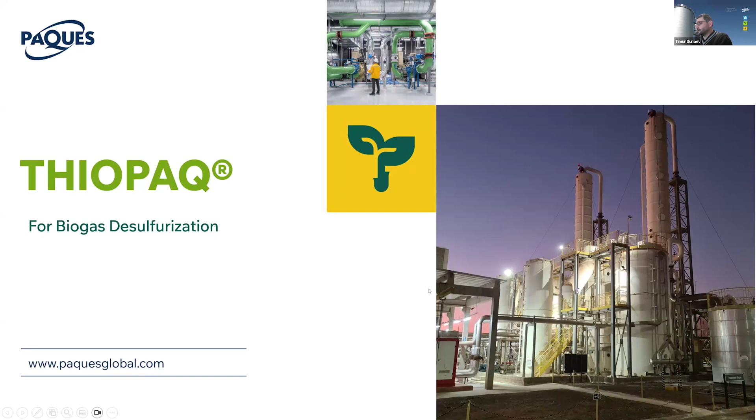You can see PAQUES right here with the headquarters in the Netherlands, but PAQUES as a business has representation across the globe. And today we're talking about our little part of the world that I represent, North America. I call it C2C, Caribbean to Canada, which is where we do our business. PAQUES has been around for a very long time and pioneered innovations in a lot of technologies.

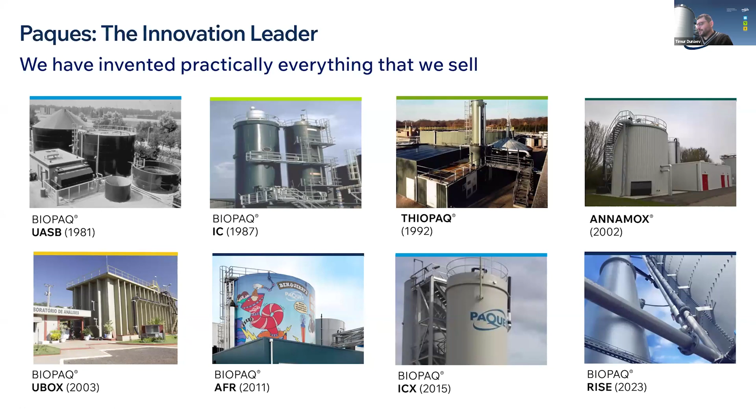And today we're going to be talking about this specific one called ThioPAQ that started in 1992, and to date we have, I think, over 350 installations across the globe and over 65 just here in North America. Most of them are actually in RNG space. So even though I still call it an exciting environmental biotechnology invention, this is now quite a mature technology with good representation across the markets.

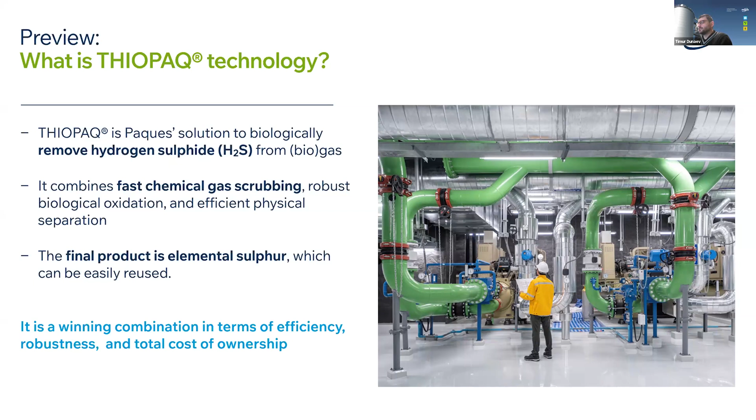So what do we do here? In a certain sense, the scrubbing portion of desulfurization is exactly the same as you would expect from chemical scrubbing, but the nuts and bolts are around the recovery and regeneration of caustic related to H2S scrubbing. So let's dive a little bit into it. Everyone knows what H2S is.

I'm sure everyone understands the challenges pertaining to H2S. Depending on sulfate and/or protein content in your waste stream and your substrate, you'll be converting it in an anaerobic environment into hydrogen sulfide, the most reduced form of sulfur, and depending on your pH balance within the system, some of it is going to be in H2S aqueous form, and according to Henry's law, in balance with your biogas, driving the H2S concentration in biogas. And reutilizing biogas with H2S can present a problem anywhere from safety to corrosion to the loss of efficiency.

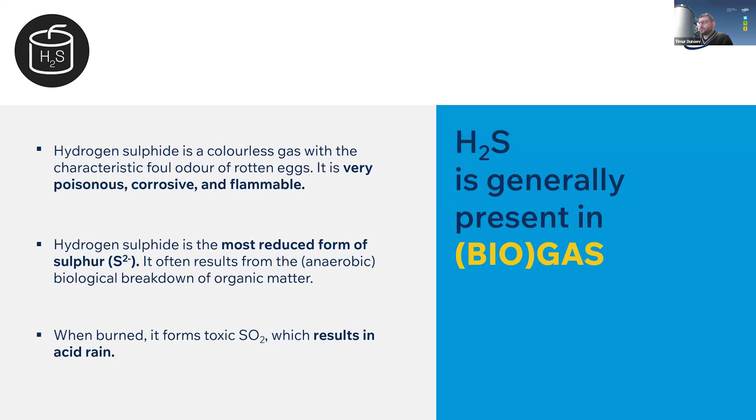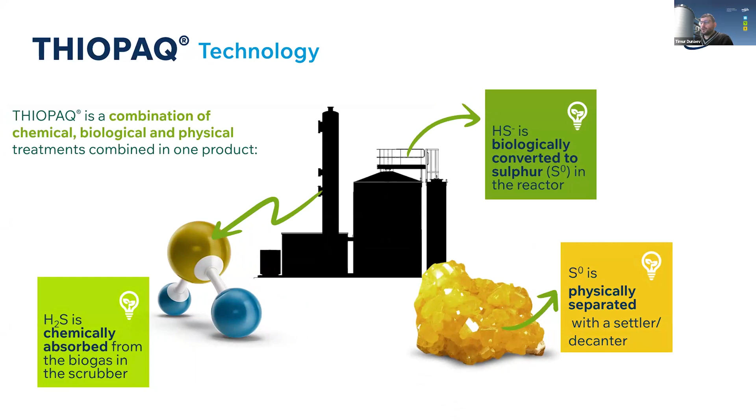And so in most of the applications, especially pertaining to biogas reutilization, but also under Title V burning as well in the United States, because during the oxidation it goes into SO2, the control of H2S is a pertinent topic, right? So as a technology, we take H2S in biogas and convert it into elemental sulfur in the biological form of elemental sulfur, regenerating some of the things in the process.

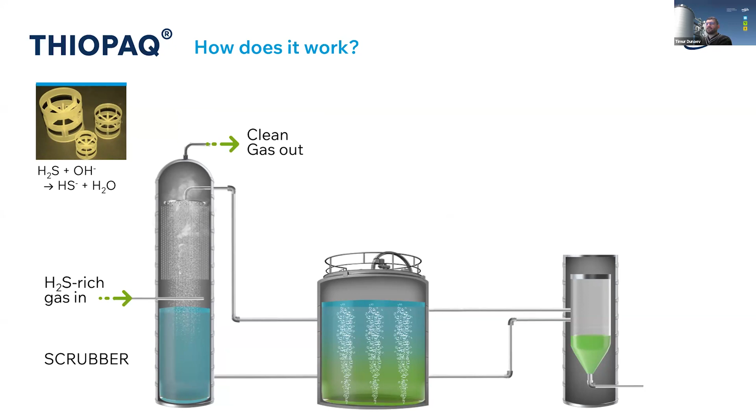As I've already indicated, the chemical scrubber portion of ThioPAQ is a basic free-flowing media countercurrent chemical scrubber with high pH desulfurization, taking H2S from gas and trapping it in the liquid form. And the media inside of the chemical scrubber are there simply to increase the surface area of the mass exchange, right? But what happens next is the interesting portion of it.

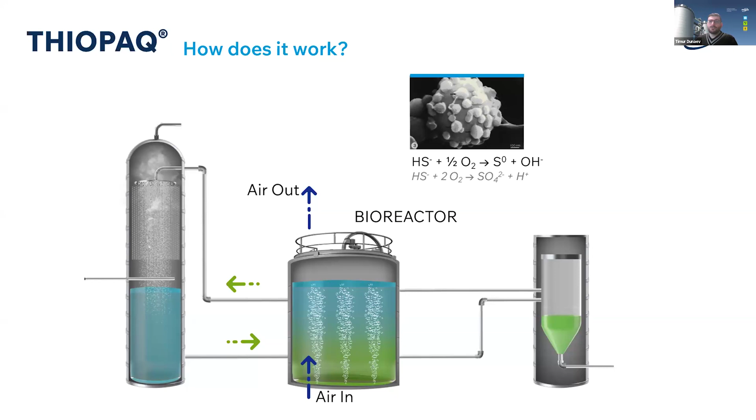Basically, what we do, we take the trapped liquid form of hydrogen sulfide in HS minus form, and then we convert it into elemental sulfur that can be removed. And in that stage, we also regenerate caustic that was trapping the hydrogen sulfide in the form of sodium sulfide. And so the caustic gets regenerated, and that liquor, after we remove the sulfur, is continuously regenerated for continuous removal of H2S from biogas.

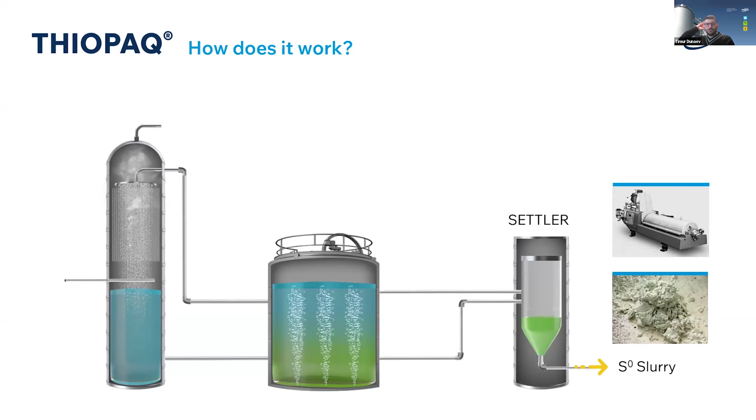What we do with the sulfur afterwards depends on the size of the application, H2S concentrations, but the basic idea, we separate it from the slurry, and it can be separated in a liquid form. It can be pre-settled and thickened, and for larger applications, we even use decanter centrifuges to separate them up to 50% solids concentration in the form of biological sulfur cake, which is quite a good fertilizer to be utilized, especially for alkaline soils. And that's the summary of the overall process.

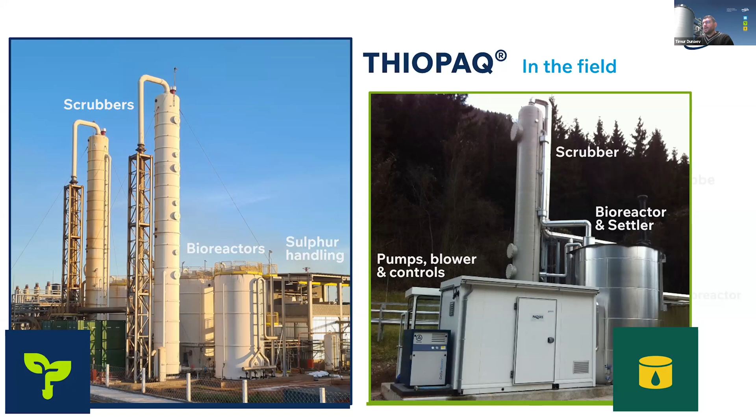So how does it look in the application? I think I started with this, but it's important to reemphasize that this is not just a biological invention. This is a well-established industrial process. So what we do is basically a supply of 2 to 3 separate parts that are then pre-assembled on site. Quite straightforward. Scrubber comes in, and then the rest of the equipment comes in either fully pre-skidded or even in a container, depending on the building availability and or climate, with the entire package control associated with it. So putting this on site is as simple as interconnecting the bioreactor to scrubber and to the skid and or container in a fully integrated system.

There is no need for additional catalysts to be introduced. All of these bacteria are naturally occurring, so we're not generating or devising any kind of bioengineered microorganisms there. As long as we maintain certain environment within the bioreactor, these bacteria and archaea will self-proliferate. To increase the speed of the startup, sometimes we bring biocatalysts from the existing installations, but that's just to ramp up the process quicker.

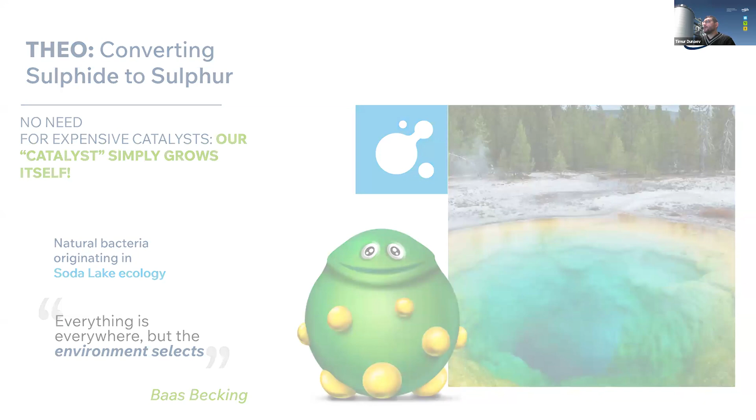The biosulfur itself is a stable form of sulfur, actually, arguably the most stable form of sulfur. Once it's converted into elemental sulfur, it takes a really long time to reintegrate it into any kind of solution, which is a big advantage. So you have a stable sulfur solution that you do not need to worry about. And in RNG applications, it's usually very, very simple to mix it with anaerobic or any other sludge or lagoon that you have on site.

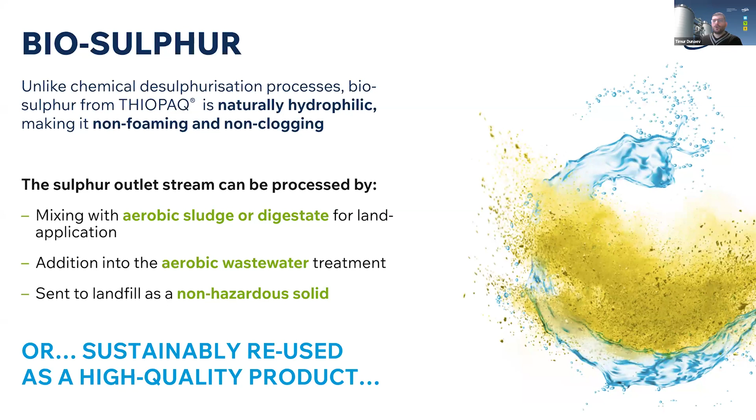And that actually usually increases the fertilizer value of your digestate. And even if that is not possible, it can be sent to landfill as a non-hazardous solid. And so after concentrating it, it's actually a relatively small stream. So it's a sustainable reuse of what would otherwise be considered a waste product.

What are the main advantages of THIOPAQ? We, unless requested otherwise, can always guarantee less than 25 ppmv of H2S on the outlet of our scrubbers. And that is with almost any reasonable influent concentrations going in. What I mean by reasonable is I don't think there is any single application with H2S, especially in the RNG sector, that is not going to be possible to be done by THIOPAQ. I would say economically, there is a low level cutoff at much, much smaller concentrations. It might not be economical; obviously with every single technology we have our sweet spots. But on the upper end, THIOPAQ is even involved in oil and gas applications at concentrations up to, if I'm not mistaken, 33% of H2S in the gas.

Extremely high uptime, and that is thanks to our full integration of the packages and our control over the equipment. You saw those skids and you saw the photo of the container. Everything is pre-assembled, everything is FAT'd. All of the mechanical equipment is reliable manufactured equipment within all of the US and overall North American standards. And we always can generate additional spares, on-shelf spares, or installed spares as necessary for the application. So really high uptime here.

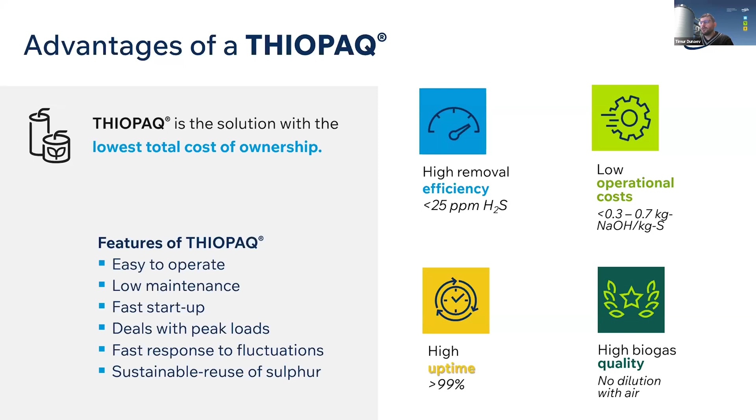Fast startup: we bring these things up within a day once the biogas can be introduced. Really durable because of the chemical scrubber application, fast response to fluctuations, and I already highlighted the reuse of stable sulfur.

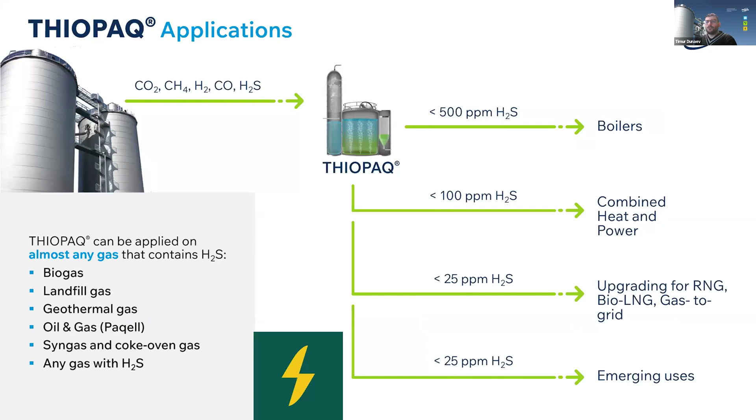The applications are everywhere, and I think I outlined this verbally, but this slide just summarizes it. As I said, we can guarantee less than 25 every single time, but if you need a little bit higher, we can integrate the system to be actually less efficient than it could be. Most of the time, the applications we talk about here in North America are biogas and landfill gases, and we have a very good fleet of installations in both biogas and landfill gas treatment.

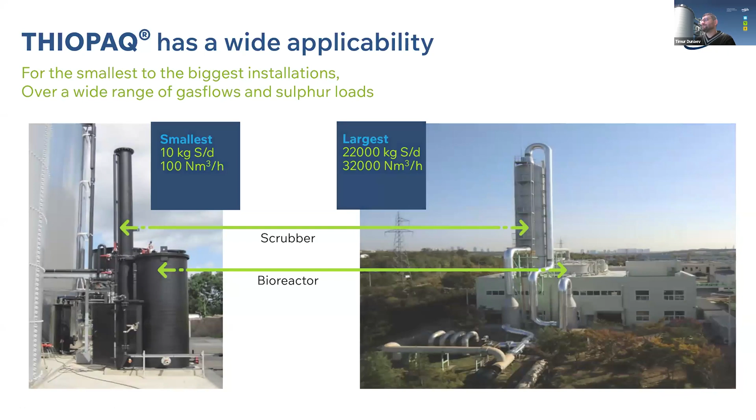I started talking about these applications, but it's always good to see the differences. The smallest installation is like 10 kilograms of sulfur per day. I would say it's not the sweetest spot for ThioPaq, but we can manufacture them as small as that, which is the picture on the left. The picture on the right is, if I'm not mistaken, in Canada at the landfill, or a Vietnamese landfill, one of the two. I forgot what this specific photo is, but this is the largest application with 22,000 kilograms of sulfur per day. And you see that the components are exactly the same: bioreactor, scrubber, but obviously the sizes are completely different.

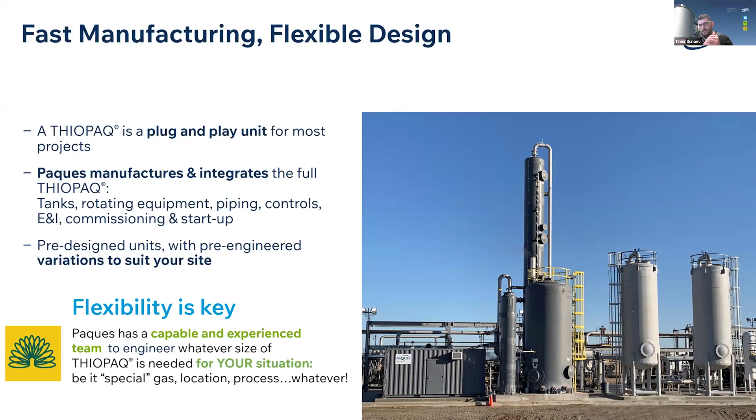Flexible design and manufacturing. Important to note, again, for the RNG sector in North America, we can certify that upward of 75% is US manufacturing. In fact, I think that number is substantially higher, but some definitions become a little bit difficult to track. Every single component that we supply in North America is in the end assembled and manufactured in North America. Some steel components for, say, a container, some of the VFDs and motors for the blowers, can be coming from abroad, but the final component manufacturing, engineering design, project management, everything is done locally in North America.

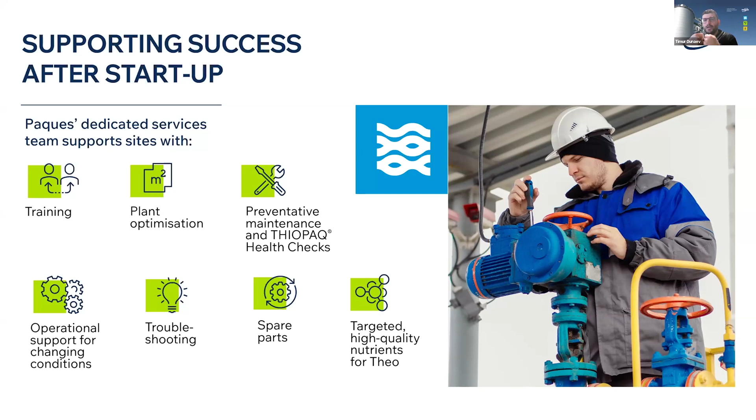Together with local project engineering and project management, I have a full fleet of field service engineers who are on the road commissioning and starting up these systems. They're located in the United States, covering from West Coast to East Coast the entirety of our installations. I know I repeated myself multiple times, but I cannot overemphasize that even though we're an international company, the entire workforce and the entire back office support for the North American business unit is here in North America.

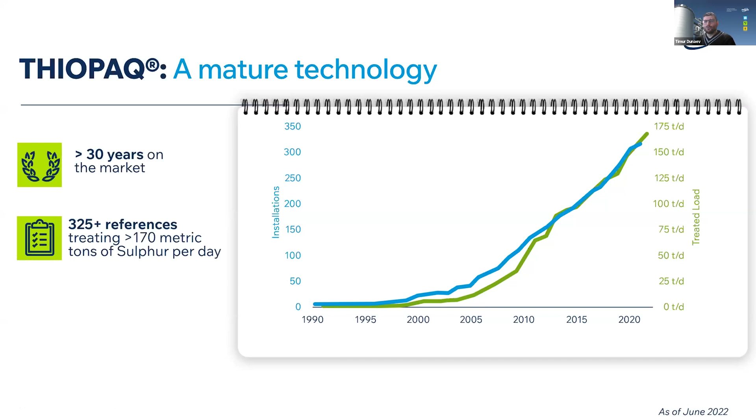Over 30 years in the market, and this number is actually over 350 at this point, because as you can see, the latest cutoff was 2022, and I can guarantee you since then we sold more ThioPaqs, including in North America. Global presence, over 65 in North America, and I think that just highlights what we're capable of, and we have a lot of good references. Most of the time I say don't trust me, go ask our clients and people who we support. I highly recommend people go onto the Biogas TV website and watch an excellent video that Paul put together last year from one of our installations, with testimony directly from our client. All of that was extremely organic, no prompts whatsoever.

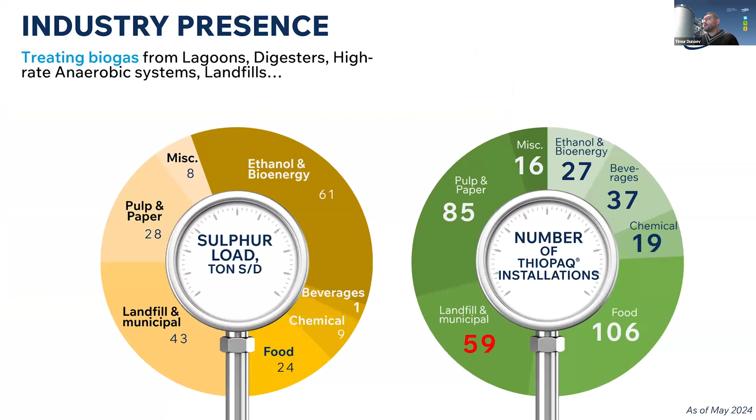Okay, I think I'm a little bit faster than I intended, but I think this is good. This is the Q&A time. Our audience has had their coffee today. We're getting hammered in the Q&A button. Love it.

A point that came up in the Q&A was many people are doing H2S suppression techniques, like adding oxygen to the headspace or ferric salts into the digester. Do you suggest they continue to do those, or do you just want all the H2S to go to the ThioPaq?

Every single technology has a space and application. I am a firm believer that both iron salts and microaeration have their own application that are specific to the customer needs. If there are fugitive emissions and stuff like that, you would still want to implement multiple technologies at the same time. Every single technology has pluses and minuses, and I would say evaluate it on your own needs. I highly recommend looking into, the criteria I would be assessing personally is how much H2S do you have, operational costs related to mitigation inside of the digester, versus what you want to do in the bulk treatment. I've seen the technology as being mutually exclusive, mutually beneficial, applied together, applied separately, and working for clients depending on their needs.

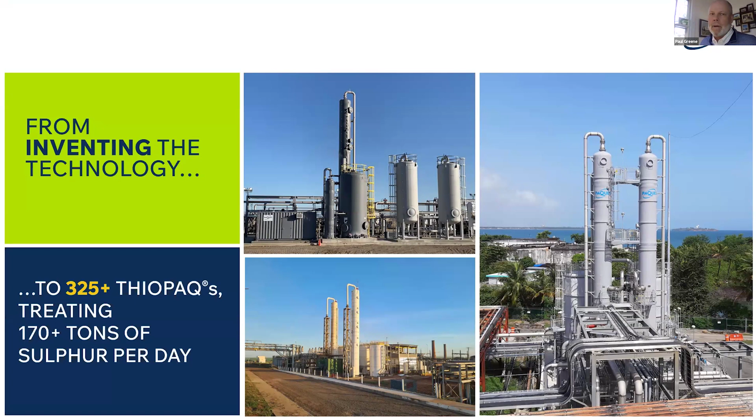I think the more sulfur, the better, and what we're seeing is ag projects have a lot of sulfur. Dairy projects, ag projects are wonderful in many regards, but the H2S is high and it's steady, so PAQUES is a slam dunk for ag projects. It's a strong answer. What Timur's going to show you here is a video from an ag site in California that we visited.

This is 6 minutes 40 seconds, as you can see it's marked in mine. I'm gonna turn the volume on. Paul, let me know if people will be able to hear. Expand your screen if you would. Is volume coming through? I'm not getting volume. So I can hear it, but I don't know if they can hear it. I'm just gonna play the video on it, okay?

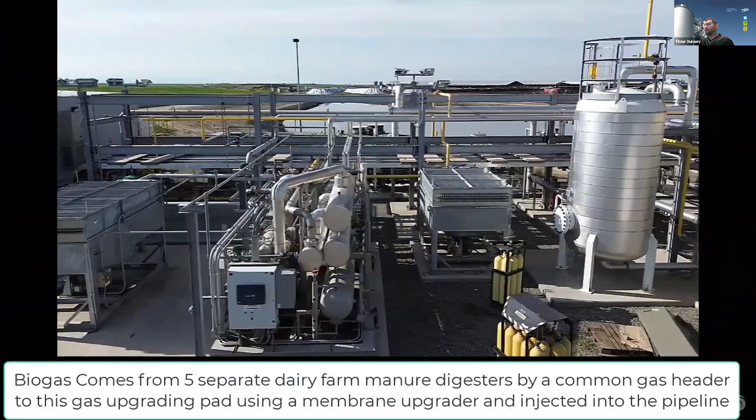You can paraphrase the owner's comments. So 5 separate farms combined - this application is where they boost it at high pressure locally, and then they send biogas from 5 different farms, and the RNG is centralized for the 5 farms, and they utilize the THIOPAQ technology. Here's the drone footage. 2 years in operation.

No issues from the system - I'm summarizing what Adam is saying basically. They're very satisfied with the removal rate. He's recommending the THIOPAQ unit. Brings tears to my eyes.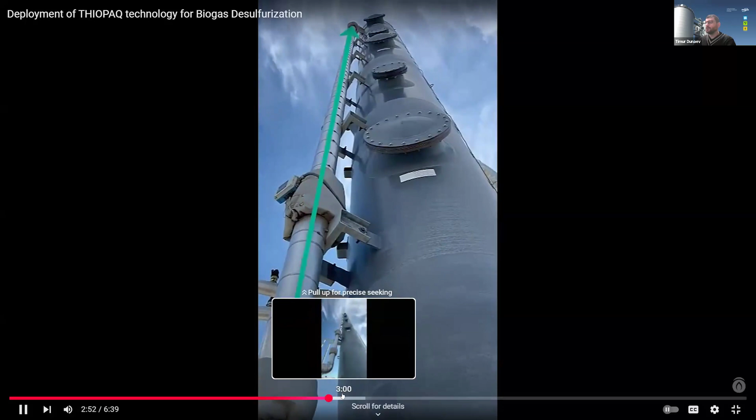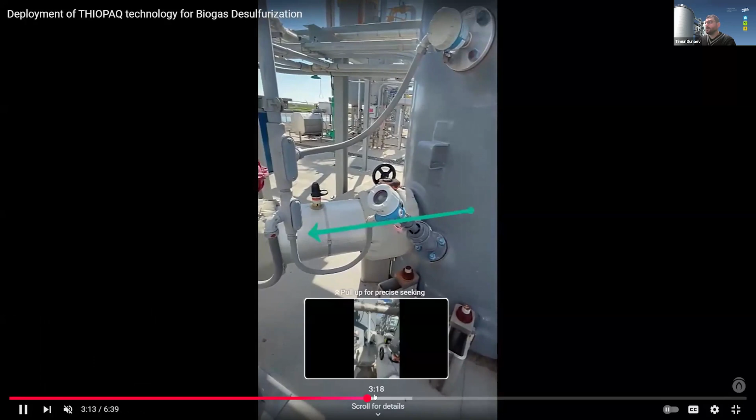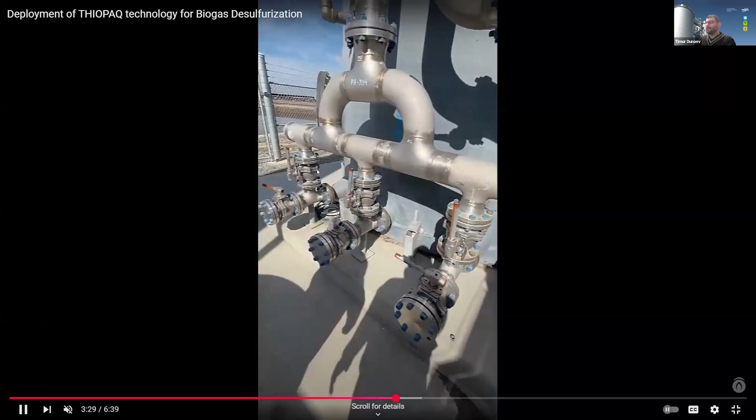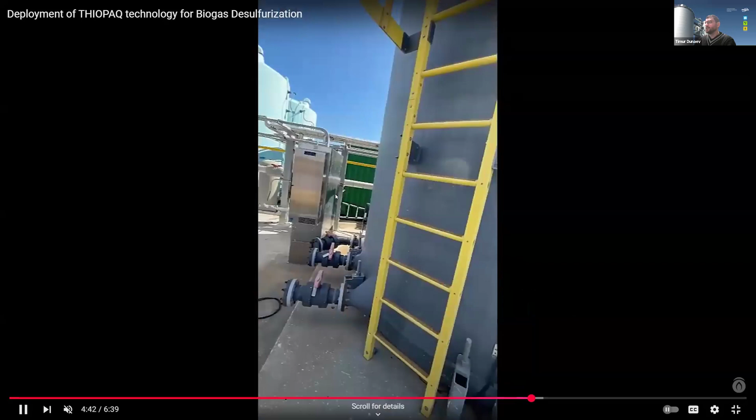Now they're showing the connection points of the lean solution for recirculating the biological fluid, and the recirculation happens for the biogas scrubbing here. Now they're showing the bioreactor where the oxidation happens - as you can see, both of those things are sitting outside. This is the rich solution returned back into the scrubber where the H2S rich solution comes in. This is the aeration header where we provide air for oxidizing sulfide into the bioreactor. I'm going to skip through - this is the control panel that is sitting right here for the decanter.

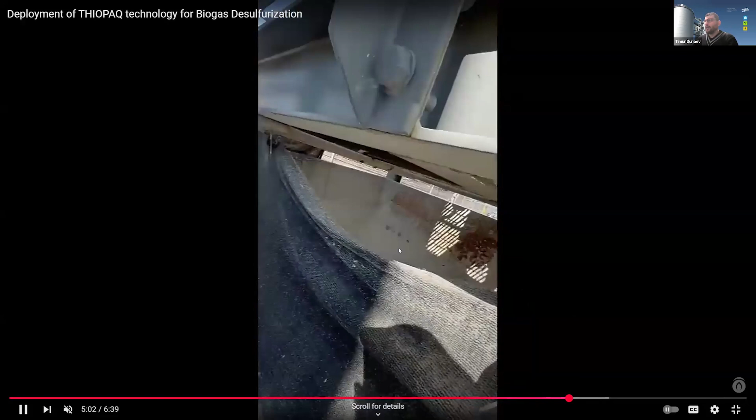The decanter centrifuge was installed on the side because they have a decent amount of load, and it made more sense. You can see how the sulfur comes out from the centrifuge, and how thick the centrifuge cake is here, so it's very easy to get rid of it.

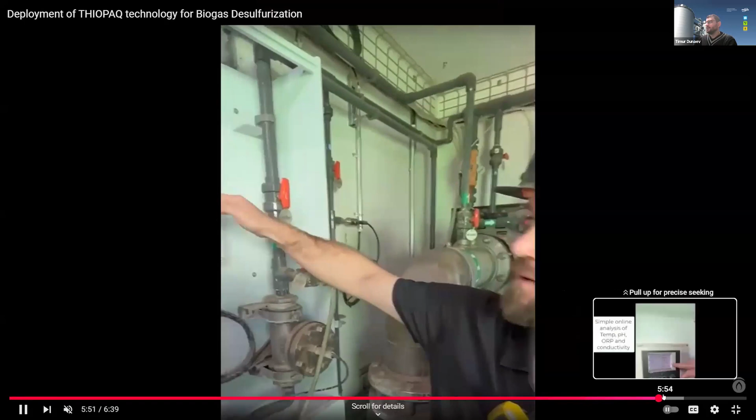Here they're discussing the controls and applications. Everything is fully automated, fully integrated into the control package, utilizing Endress+Hauser and Allen-Bradley for the controls, which is standard in North America. Everything is containerized, including the recirculation pump. Only 10 hours per week of labor is needed to operate this, including biological testing and maintaining the biology of the system.

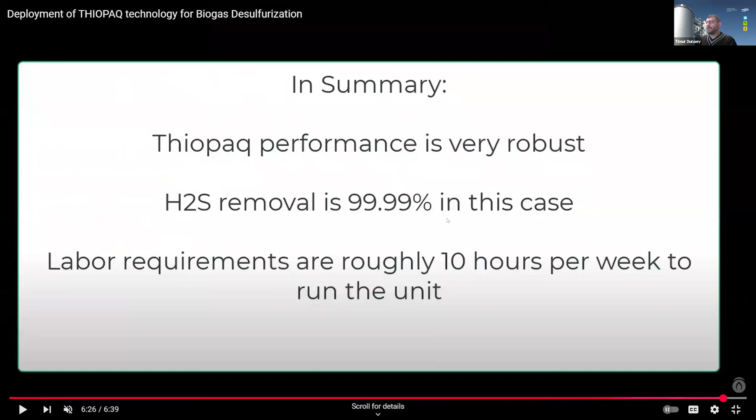The summary is 99.99% H2S removal in this case, with a maximum of approximately 10 hours per week to run the unit.

Highly recommend watching the video. As my middle schooler kids say, the introduction music slaps. It slaps. That's extremely funny.